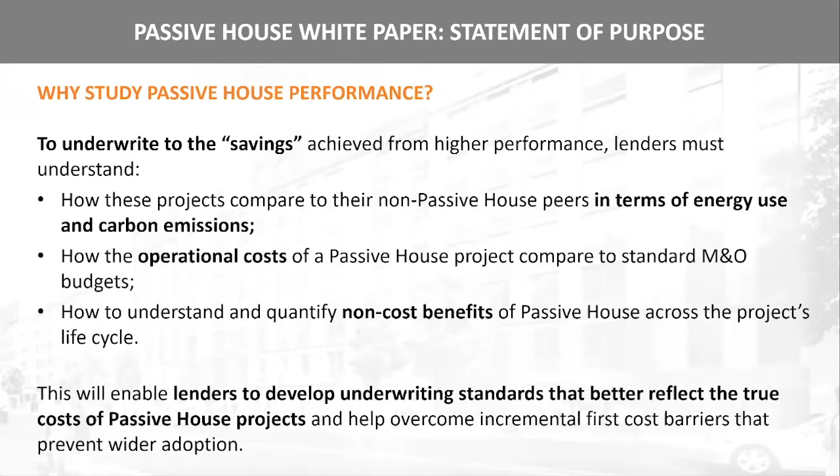In this effort, we focused on understanding the energy performance of these early adopters. We also looked at their carbon emissions and their operational costs in terms of energy. We've begun to look at development costs and non-energy benefits of passive house as well. And our goal in all of this is to really help lenders figure out how to accurately underwrite to these types of projects and help expand their prevalence in the city.

So let's talk about the agenda and go through what we're gonna discuss today. So to start off, we're gonna have some technical background on what passive house is all about. Then we'll move on to looking at the energy consumption of 6 early adopter passive house projects compared to typical multifamily buildings in New York. After energy consumption, we'll do a similar comparison of our early adopters to peers based on greenhouse gas emissions, and look at the impact under Local Law 97.

Then we'll move on to looking at costs and how energy costs at these properties compare to what would be typical budgeted costs in an affordable housing underwriting process in New York City. We'll then lay out a methodology for underwriting to energy savings in these types of projects. And finally, we'll summarize our takeaways and talk about next steps for continuing this research into the future. So let me pass it off to Joanna from Steven Winter Associates to give us the technical background.

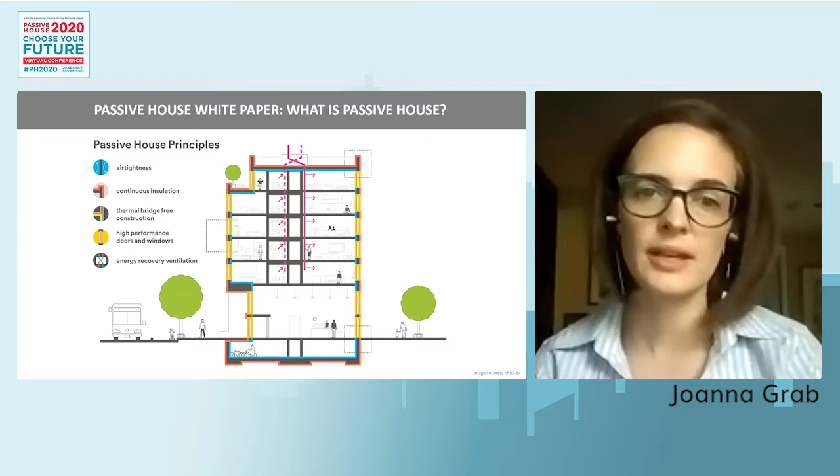All right. So you may already know about passive house, but let's highlight some of the features that make passive house projects different than a typical building. Passive house can be any type of building. It is not exclusive to residential, and the goal is to design and perform very efficiently, and it uses a systems approach. Some of the features, as you can see, are an airtight building with continuous insulation, high performance windows and doors, reduced thermal bridges, and that these buildings require inspections and a team approach during design and construction.

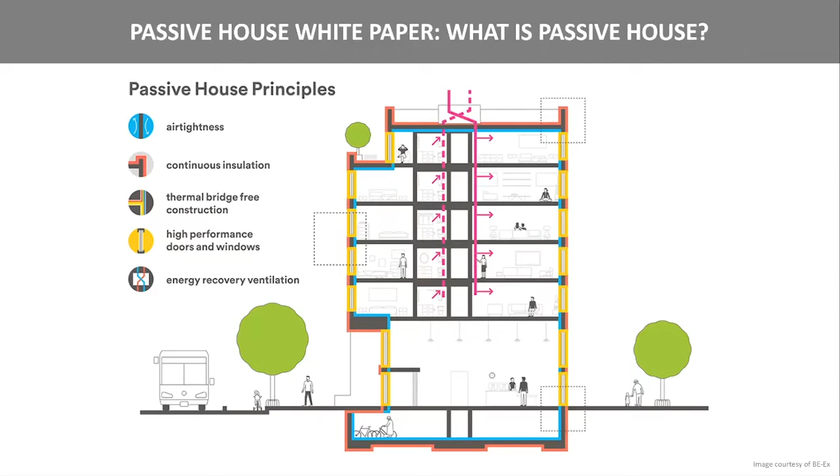Another really important feature is that they have controlled filtered air pathways for fresh air coming into the building and another separate pathway for air exiting the building. So we use something called a heat or an energy recovery ventilator to provide this ventilation. And as a result, these buildings require smaller heating and cooling equipment. So they often use a VRF, which is a variable refrigerant flow. It's a centralized heat pump system that offers heating and cooling, much like a refrigerator that can operate in both directions.

So passive house buildings are really impactful to both residents and the communities that they're in. So they're really efficient. They reduce energy and carbon and align with the international and New York City climate goals.

They have low operating costs. They are resilient, kind of like a thermos, so residents can shelter in place. They're comfortable. Air tightness and an improved envelope means better thermal comfort and quieter spaces for occupants. And they have a big health impact. There are improvements in air quality over a traditional building, and that's a result of providing an exchange of fresh and filtered air and a separate pathway for exhaust air.

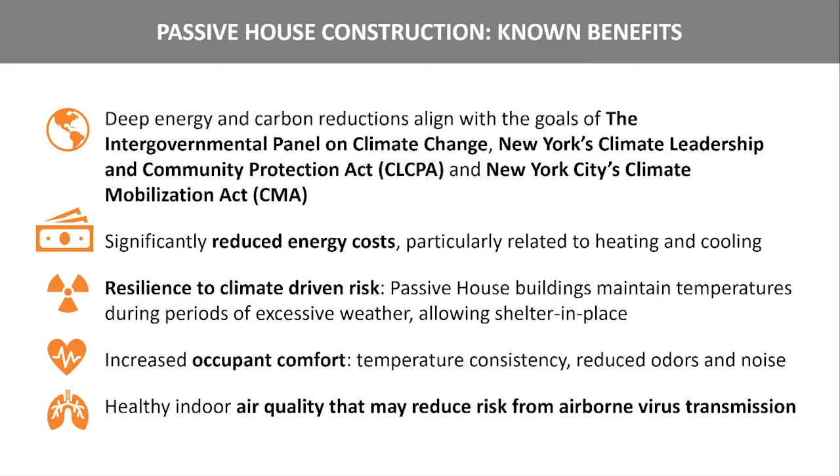All right, so when we're looking at these types of projects, we look at energy models and also reality. So energy models are informed estimates. This is why we want to see how these buildings are truly performing, how the energy model compares to reality. So energy models are useful for evaluating one model against another, but we know reality is different. The goal in a perfect world is to have these aligned.

Specifically, we need to look at how multifamily energy model defaults account for a few different things. So there's a lot of behavioral differences. Americans just have different habits than Europeans who wrote the initial passive house standards. These have evolved, but it's still a good thing to really focus in on. I like to think about just our hygiene habits. Do you turn your shower off while you soap up? I don't think so.

Another aspect is density. So models utilize certain density counts based on square footage or bedroom counts. How does that differ from real life, especially in dense cities? Another aspect is unit size. We New Yorkers, we know about small apartments, especially now. This density is not universal for apartments across the US. This is a unique factor in New York City multifamily projects. And so, a very granular level of data and monitoring will tell us this. So this is a starting point, and we want to investigate dense multifamily buildings and how they operate.

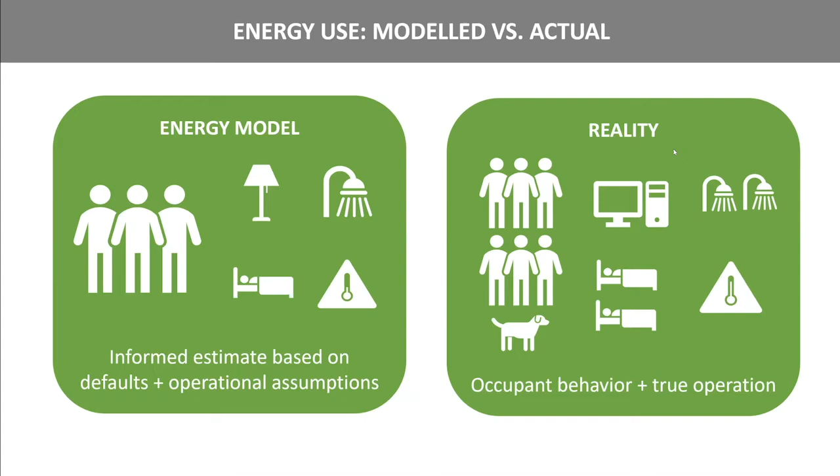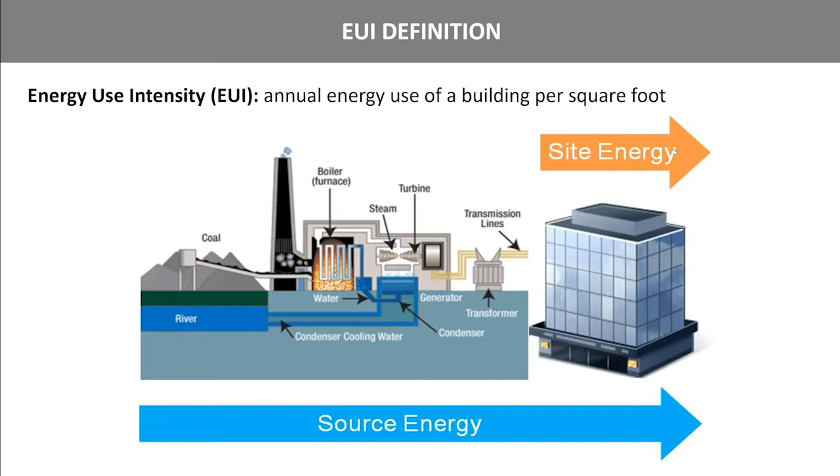Another type is site EUI, and that looks at the amount of energy consumed just on that particular site. And both of these account for different fuel types. So we'll be talking about site EUI when we're analyzing these particular buildings.

Great, thanks for that really helpful background, Joanna. So we're now going to dive into the first piece of results, which is looking at how passive house projects compare to their peers. Quickly to explain kind of our methodology for doing this comparison. The first step was we looked at data that was already available within Bright Power's Energy Scorecards database to identify a set of passive house projects that we already have data on. Now, Bright Power's Energy Scorecards is an online service for tracking energy and water use. So it's important to realize the data that we got wasn't originally captured as part of a study. It was building owners trying to track their performance of their properties.

So we actually had to review this data really carefully, make sure it all met the same consistent criteria. And we whittled it down to a set of 4 New York City multifamily passive house projects in our database that met the criteria. Then folks from Steven Winter Associates contributed data on another 2 passive house projects. So you'll see a set of 6 passive house early adopters that are our kind of key data set for this project. I will say that in our next step, we would really like to expand that data set. We already have about 20 that were tracking in Energy Scorecards, although they didn't all have the same level of data as these that are included in the study now.

Our next step was to create peer groups. And so we also leveraged Bright Power's Energy Scorecards database for this. We looked at 2 peer groups for comparison. The one to pay most attention to are buildings built in 2003 or more recently. Those we think are the right peer set for recently constructed multifamily passive house projects in New York City. And then we have another one for comparison of the older projects that were built before 2003.

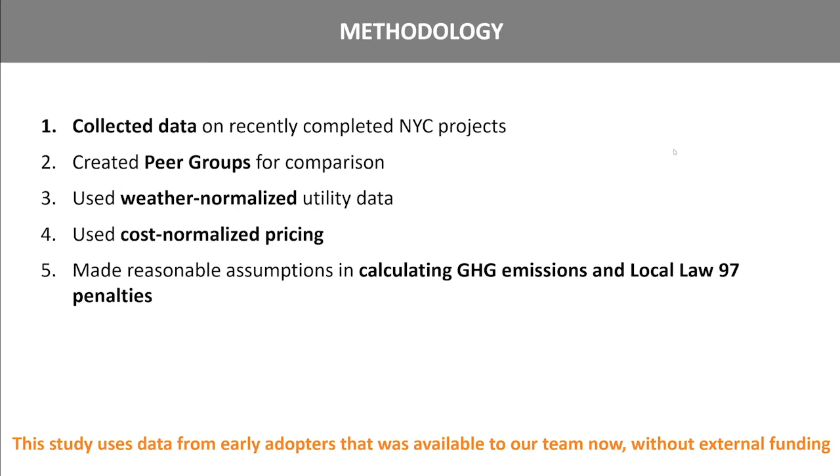We also normalized for weather and for cost when we get to the cost comparison, because we want to make sure that slight differences in the time period that was used aren't screwing up our comparison. Finally, in the greenhouse gas emissions comparison that you'll see, we used actually the same assumptions for emissions factors that are in Local Law 97 in New York for calculating greenhouse gas emissions from our passive house set, so that it's an even comparison to how buildings would be treated under that law.

We're really excited to share these results. I'll pass it to Jamie to tell you a bit more about the data in detail. Great, thanks so much, John.

So one of the first steps in setting up our comparisons was establishing our peer groups of conventional buildings that we were going to use as control groups for this study. So at the top left-hand corner of the slide here, you see our base case building group. And for this group, we decided to use buildings in New York City that were constructed using conventional building methods that were built after 2003.

And our goal with this was to make sure that we're comparing recently constructed passive house buildings to recently constructed conventional buildings. We didn't want age effects to play into the results. We wanted to make sure that the results we're seeing in this study were the result of high performance design techniques and technologies and not a result of age effects.

So in this post-2003 control group, we have 315 buildings from Bright Power's Energy Scorecards database. They all have at least 12 months of operational data. We decided to use a mix of gas and electrically heated buildings because our passive house groups also have a mix of gas and electrically heated buildings. And we have 315 buildings all built after 2003.

Having said that, our team was also really interested to see how our passive house buildings compared to a much broader group of existing buildings. So in the bottom left-hand corner of the slide, you see that we also decided to include a pre-2003 control group of buildings. So this is a much bigger data set. We have 1,633 buildings, again, with 12 months of operational data at a minimum. Again, a mix of gas heat and electric heat.

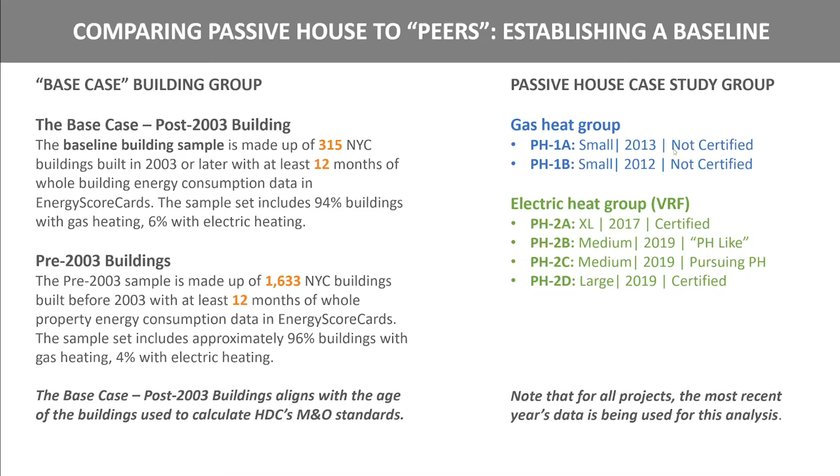There has been an incredible increase in interest and in the number of passive house projects that are in pre-development and currently in construction. But again, we needed 12 months of operational data in order to include them in this study. And so we were fairly limited. And so the buildings that we have here represent the early adopters, and they represent the first available data for multifamily passive house buildings in the city.

So one thing just to note is that we're really excited to see this sample size increase over time, as John mentioned, and look forward to getting more data in the coming months and years as more passive house properties come online. But for now, we've got 6 study buildings and 2 control groups, and you'll start to see our results beginning with energy use intensity on the next slide.

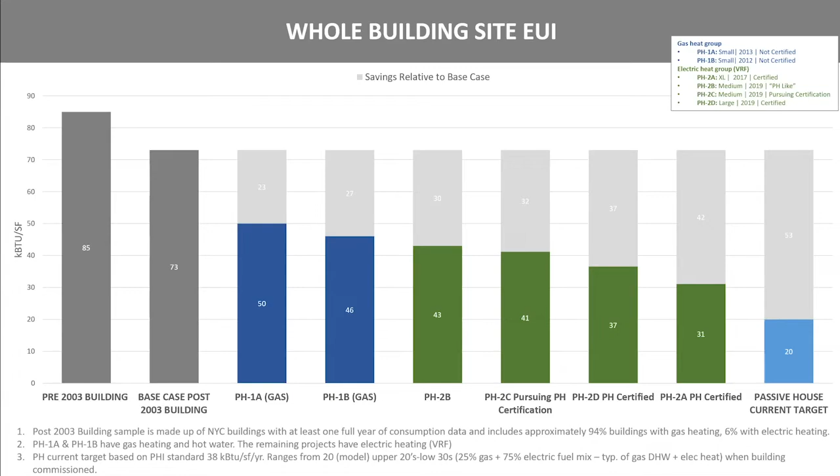So what is this graph telling us now? The performance of these passive house and passive house-like buildings in the blue and green bars are not quite meeting that passive house model target. They're approaching it. So for those of you who've attended this conference for the past several years, we in the passive house community have been anticipating a performance gap, and we need to use actual energy use to identify this gap. So now we have it.

So we'll talk a little bit more about what we can do to follow up on this in the future.

Like John said earlier during our agenda slide, EUI isn't the only way to evaluate these buildings against their peers. We looked at greenhouse gases, which trap heat in the atmosphere, and they include carbon dioxide mostly, methane, other gases, and they're measured in carbon dioxide equivalents. This is really important in New York City because buildings are responsible for 2/3 of all carbon emissions.

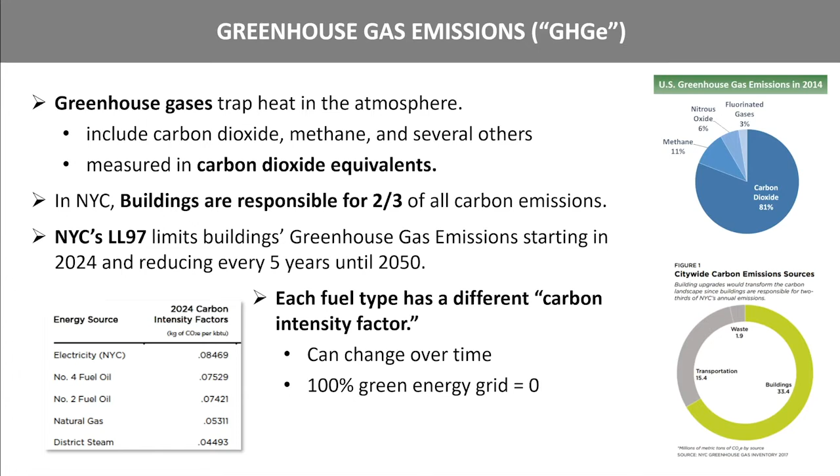And New York City recently enacted Local Law 97 to combat building level greenhouse gas emissions. Each fuel type has a different impact depending on how much emissions it yields. When the energy grid is all green, the carbon intensity factor will be 0. That's the goal. Thank you, Joanna.

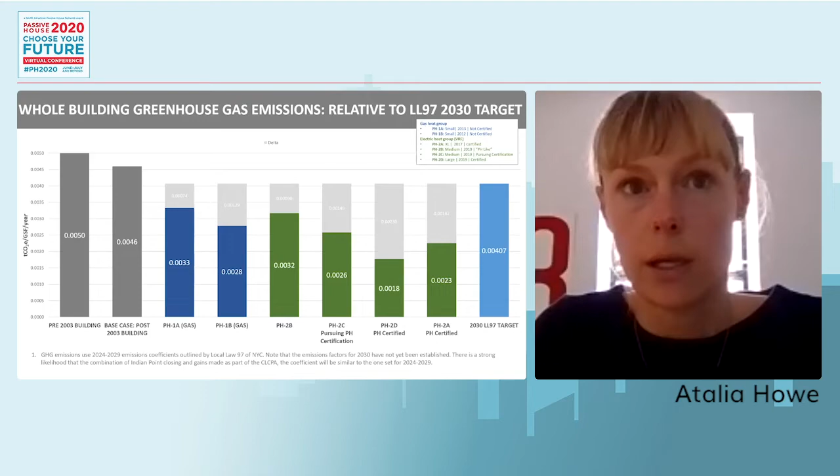So here we show how the Passive House study group and the pre and post 2003 control group perform in terms of operational greenhouse gas emissions per square foot compared to New York City's Local Law 97 2030 emissions cap, which is shown in light blue to the right. So the greenhouse gas emissions were measured using the 2024-2029 emissions coefficients outlined in Local Law 97 for both gas and electricity. And it's important to note that affordable housing is currently exempt from Local Law 97 caps.

However, given the impact that this subset of the building stock has on overall citywide emissions, it's very likely that they will eventually be pulled into the law in some shape or form.

As you can see, all of the passive house projects, even those that use gas for heating and domestic hot water, would easily comply with the 2030 emissions caps and are in fact comfortably below the caps. And what this really sums up is that these buildings will not need to invest in measures to reduce their greenhouse gas emissions in order to comply with Local Law 97. Compliance is really built in based on their energy efficient design.

Local Law 97 stipulates that an owner of a covered building that has exceeded its annual building emissions limit shall be liable for a civil penalty of the difference between the building emissions cap for the year and the reported building emissions, multiplied by $268. In other words, to simplify that, $268 per metric ton of carbon dioxide equivalent over the limit.

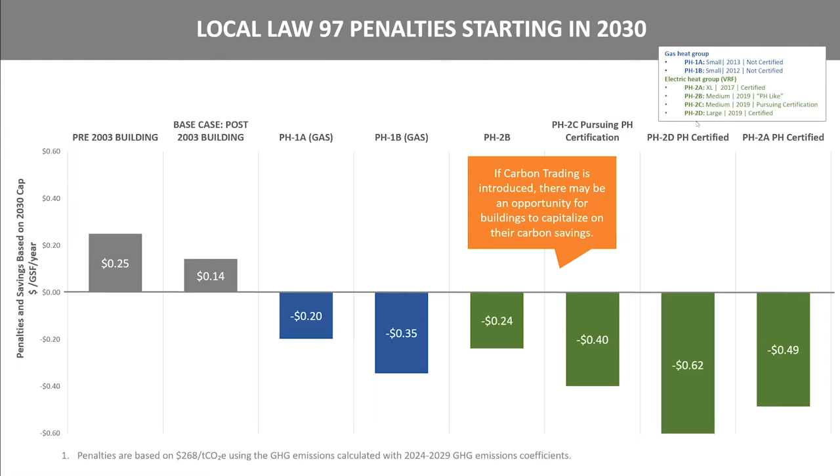Here we show how the Passive House Study Group and the pre and post 2003 buildings in our control group perform in terms of operational greenhouse gas emissions per square foot compared to New York City's Local Law 97 2050 emissions caps, shown in light blue again on the right. Greenhouse gas emissions were measured using the 2024-2029 emissions coefficients for gas, and an emissions factor of 0 was used for electricity. This is predicated on the goals of New York State's Climate Leadership and Community Protection Act, which assert that New York State will have an emissions-free electric grid by 2040.

And as you can see here, even when evaluated against this ambitious target set for 2050, all but one of the Passive House projects comply with the cap, and all of the electric heat group projects in green are equal to or below the cap.

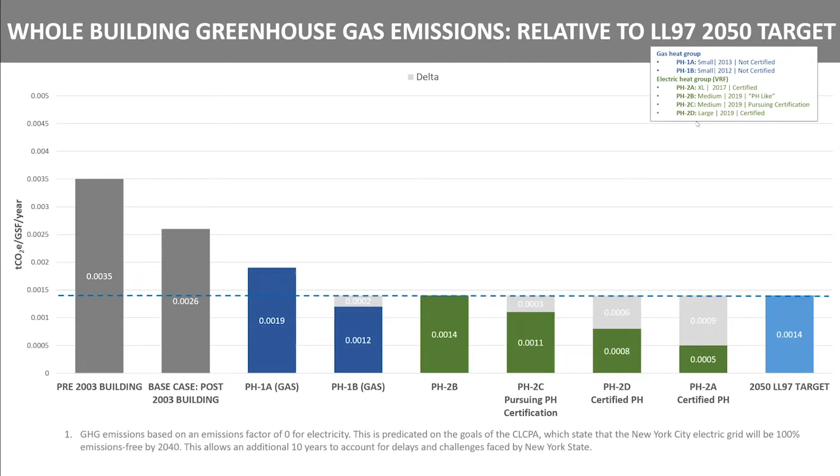Again, this chart shows the greenhouse gas emissions reductions we saw on the last slide translated into avoided penalties or cost savings per square foot, illustrating the reduced financial risk for these buildings as a result of carbon regulation. The base case buildings could face steep fines if no work is done to reduce the building's operational carbon emissions, whereas all but one of the passive house buildings are already in compliance.

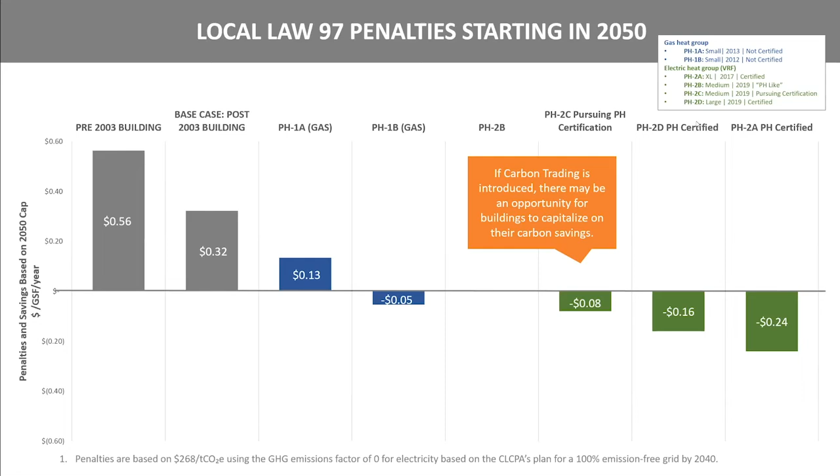This really just highlights how future-proof these buildings are, and the way they're designed allows them to never hit the penalty threshold. Summarizing what we saw on the last slides, here we show the total avoided penalty for each passive house building and the base case control group, based on the building's total gross square footage and the Local Law 97 penalty of $268 per metric ton of carbon dioxide equivalent.

If a carbon trading scheme were introduced in New York City, this would allow building owners to capitalize on their carbon savings, selling those savings to building owners whose carbon emissions are above the limit. As the table shows, these potential revenues could be quite significant for building owners, ranging from nearly $5,000 to $132,000 per year in 2030.

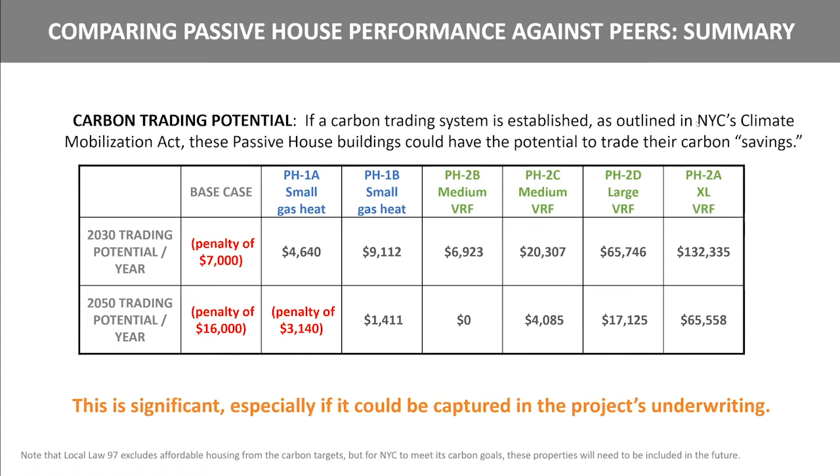Given the more stringent caps in 2050, these amounts are slightly lower. However, all but one of the passive house projects avoid paying any penalties at all. On the flip side, the base case buildings could face penalties for being over the cap if they do not pursue low carbon retrofits between now and 2030. This really highlights the importance of taking a long-term approach when evaluating the full costs and savings of high performance.

Thanks so much, Atalia. Really compelling. I want to quickly recap what we've learned so far from this comparison of our early adopter passive house to peer multifamily buildings.

Even with this small data set, it's really clear that the passive house projects are performing substantially better than other recently built New York City buildings. On the energy side, we saw EUI energy use reductions ranging from 32% up to 58%, and on greenhouse gas emissions from 28% up to 62% reductions.

Some observations we want to dig into further in future study: on the energy side, the passive house certified projects do seem to perform better than non-certified properties that were just designed to passive house standards. Also, the electrically heated properties perform much better than the gas heated properties. So insights there that we can keep exploring.

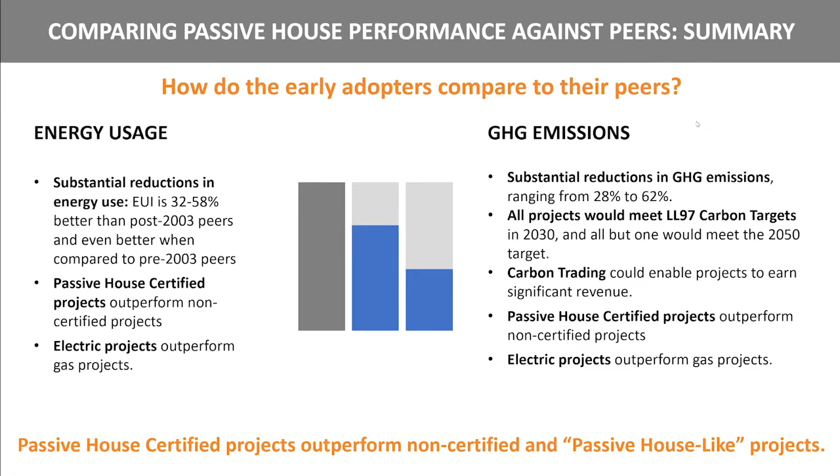In terms of Local Law 97, the passive house projects not only meet the targets, but if carbon trading is rolled out, which as Atalia mentioned is being actively discussed, they would not only avoid fines but could represent a significant revenue opportunity, which I think is particularly compelling for affordable housing that could pursue passive house and get a new revenue stream for that property.

Great, thank you, John. So next we're going to take a deep dive into each of the passive house buildings that we studied in this project. In this next section, we're going to set aside the control groups we talked about previously.

Instead we're going to compare the actual performance of each of the 6 passive house study group properties to their expected performance. From there, we're going to start to understand actual performance versus expected performance, instead of, as earlier, actual performance versus conventional building actual performance. I'll explain next how we're going to do that.

What you're seeing here on this slide, on the right-hand side, is the case study building. This is a cost and weather normalized chart of the actual utility expenses using data from the most recent year. Gas is shown in orange, electric is in blue, and the savings are shown in a light gray bar. On the left-hand side, you see the expected performance.

For this chart, we're using the standard underwriting assumptions provided by HDC and NYCHA. In order to get the building owner costs, we use the standard HDC underwriting allowances in the M&O standards, and for tenant electric we used NYCHA standard assumptions.

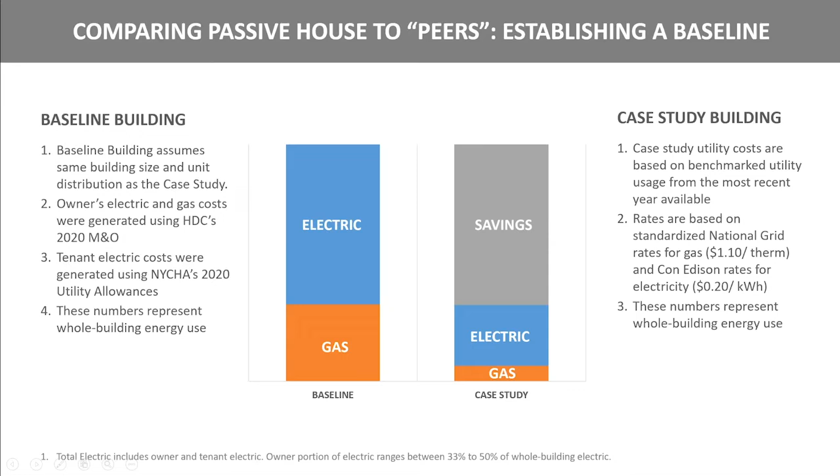In the next slides we're going to talk about how each of these case study projects compared to what their performance would have been if they were designed and built using conventional methods. Our goal with this study and analysis is to understand the cost savings and then strike up a conversation about if and how we can capture some of those savings in underwriting. So I'm going to turn it over to Jen, and she'll talk us through each of these case studies.

I'm going to walk you through the 6 case studies, the 2 gas heated projects and the 4 electric heated projects. I'll spend a little more time on this first one so everyone's familiar with how to read these case studies. I think that'll make it easier as we go through all of them.

The first project is a small building completed in 2013 with gas heating. It was not certified as a passive house project, but it was done by a committed team of early adopters who were way ahead of the curve for multifamily passive house in New York City. Even though it's not certified, the overall energy savings are really compelling compared to the baseline. We're seeing savings equating to over $40,000 per year. That's pretty significant for a small building. It also means the building is using less than half of its budgeted energy costs.

If even 50% of these savings were underwritten, the project could leverage from $200,000 to $300,000 of additional debt and reduce the subsidy required to build this. We're using rough calculations to illustrate this, but it's useful to contextualize the idea of underwriting to savings. Before I move on, remember these case studies are abstracted using normalized costs, so they won't match utility bills exactly. Also remember they show whole building energy use, which includes tenant electric as well as owner.

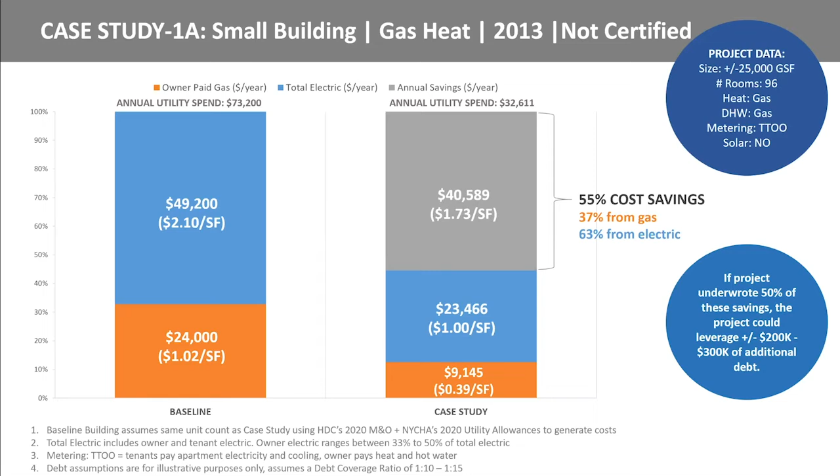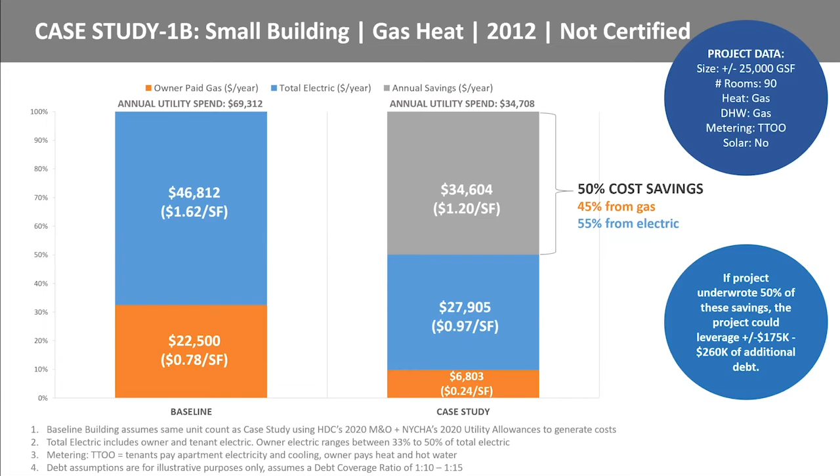The next case study is really similar to the previous project, although it was completed one year before. The savings and energy profile are very similar, and again it's clear there's a lot of additional debt that can be leveraged.

Now we're going to talk about 4 projects with electric heating, VRF systems, just to be clear. This project is a very large and very tall building, also noteworthy in New York City. While this project is not specifically an affordable housing project, we modeled it that way so we could compare it to the other case study projects. You can see that the energy costs are reduced by nearly half, which is more than $300,000 per year in utility savings. Pretty substantial.

This project also has a lot of studio apartments in it, and they tend to have higher energy use intensities than larger apartments, which makes this even more compelling. A really large project like this could potentially unlock more than $2 million in additional debt, also significant.

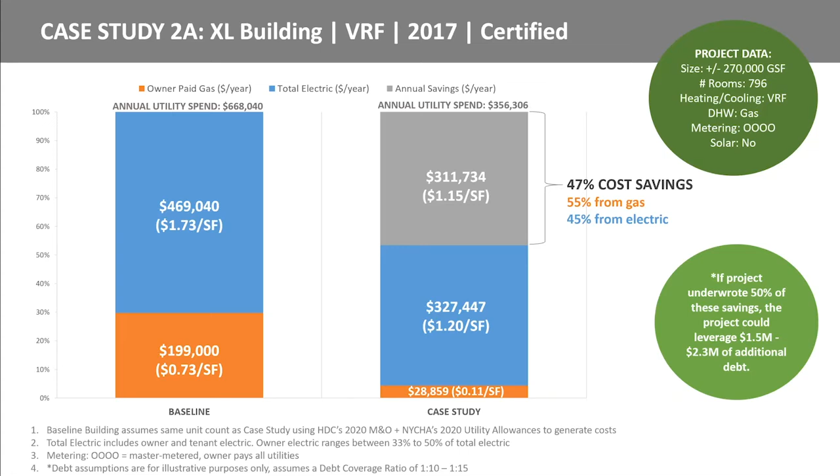A couple things to note for the electric projects. Electric heat is considerably more efficient than gas, but it does have a higher unit cost—electricity costs more than gas on a per unit basis. So while there are significant energy use and carbon emissions benefits, the costs don't quite keep up with that. Keep that in mind. Also, gas has not been completely eliminated on these projects; it's still used primarily for hot water heating. And another thing to note is all of these projects have heat paid by the building owner, which is relevant to some of you, probably more than others.

This next case study is a bit of an outlier. It's our only passive house-like project. Not only was this not certified, it was never intended to be certified, but it was built to passive house standards. We included it because, first of all, we have a limited data set, but also it achieved really significant savings, and it was a useful comparison for the other projects. You can see it reduced its utility cost by almost 50%.

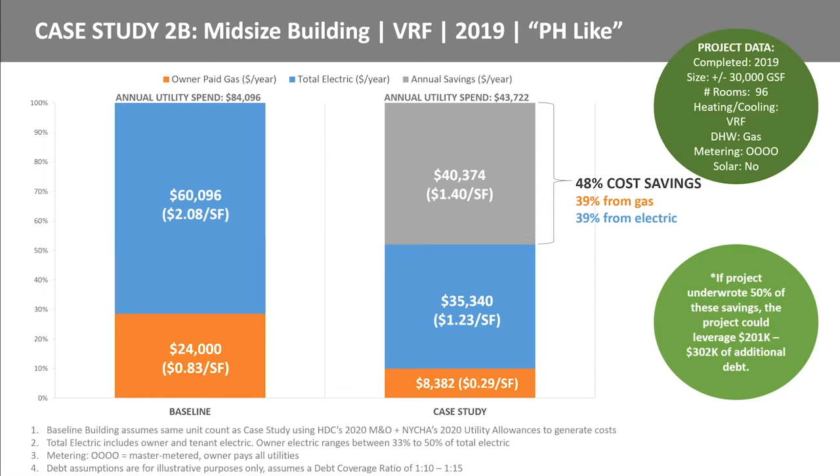This next project is another mid-sized project, and it was the first passive house project for the developer, although not the entire passive house team. It has a solar array to help offset the electrical cost, which is key for some of these projects with electric heating. One thing I'll say is it did not complete until late 2019, and we only have first-year data on this project. That can sometimes be overly high as building owners learn to manage and commission the systems, and as tenants get used to using electric heating and controlling their own systems, which is new for a lot of people in New York City.

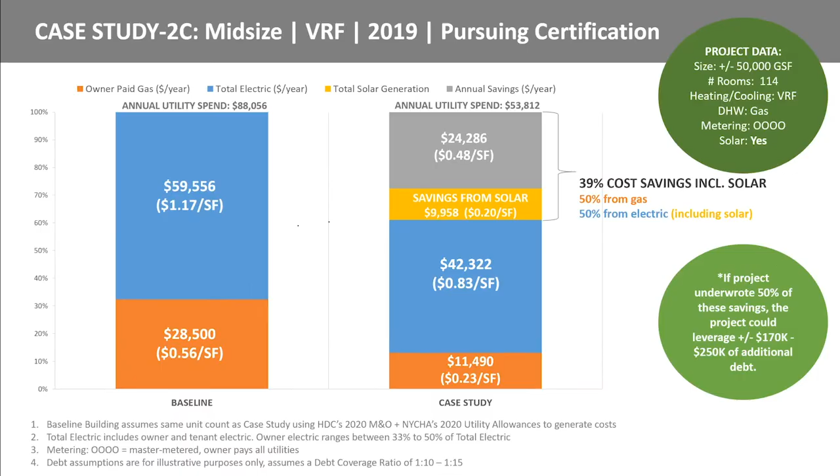Finally, our last case study, and this one is certainly the most compelling in terms of cost savings. This project really pushed the envelope—that's kind of a bad pun—but it included cogen to supply most of its hot water heating and an extensive solar array across a huge percentage of the roof.

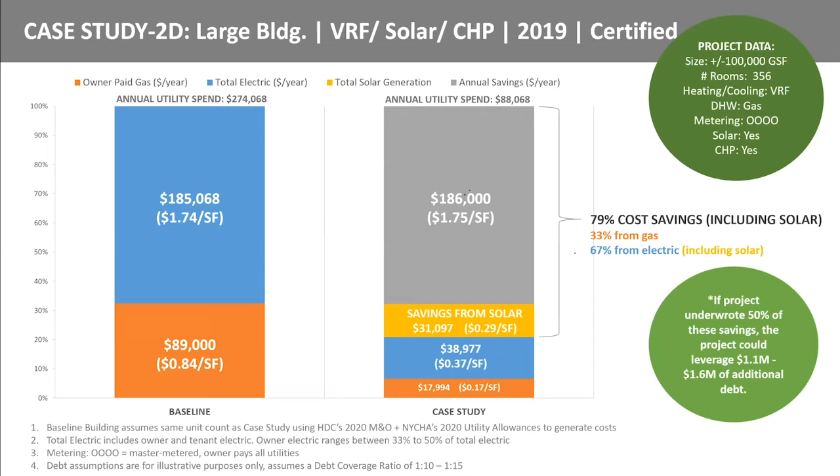The combined annual savings of this project, when you take solar into account, are well over $200,000 a year, which is really great. And in this case, if the project underwrote 50% of these savings, an additional more than $1 million could have been leveraged to support the higher incremental cost. It's really challenging to draw conclusions from only 6 projects, but you can see that overall the case study projects are performing extremely well, especially given that these are the earliest adopters, the pioneers. The cost savings are really significant, and we've seen that that can unlock additional debt to support the project costs.

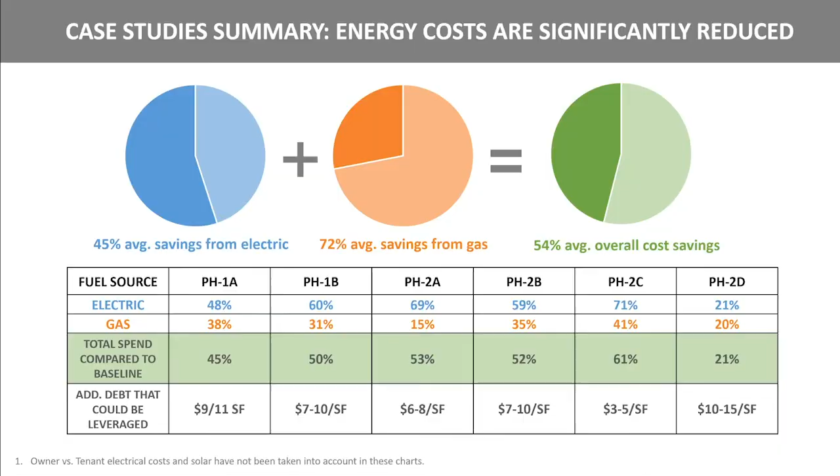Now that we know how well these projects are performing, though, what do they cost? And do the cost savings support the additional cost? Let's talk about that a little bit.

I'd love to be able to say, and I'm sure you'd love to hear it, that we have accurately determined the incremental cost of Passive House in this study, but I can't. I'm not going to do that. We do think that the 3 to 8% range that New York City experts suggest is really accurate. We've seen that to be true, as well as we could understand that by doing this study. And definitely the experienced teams can produce these projects at the lower end of that range.

We also learned a few other things. One, it's extremely difficult to isolate the costs since nobody ever builds the non-passive version of their project. The costs kind of get lost in the noise, and that's because projects in New York City tend to have high costs for a number of factors.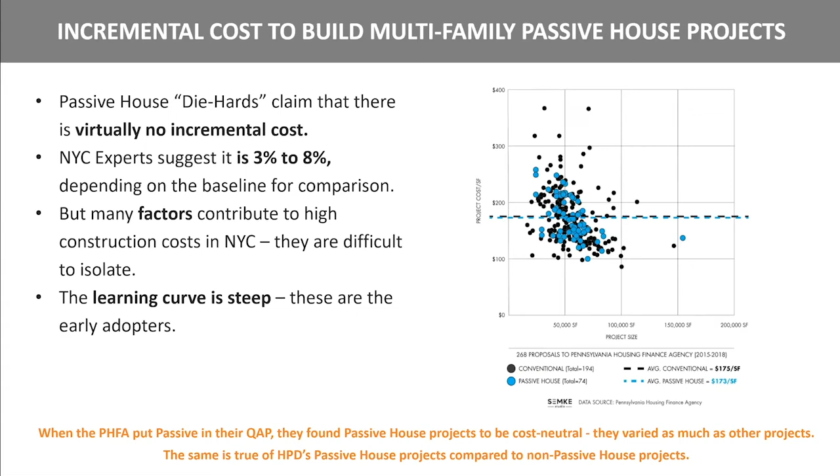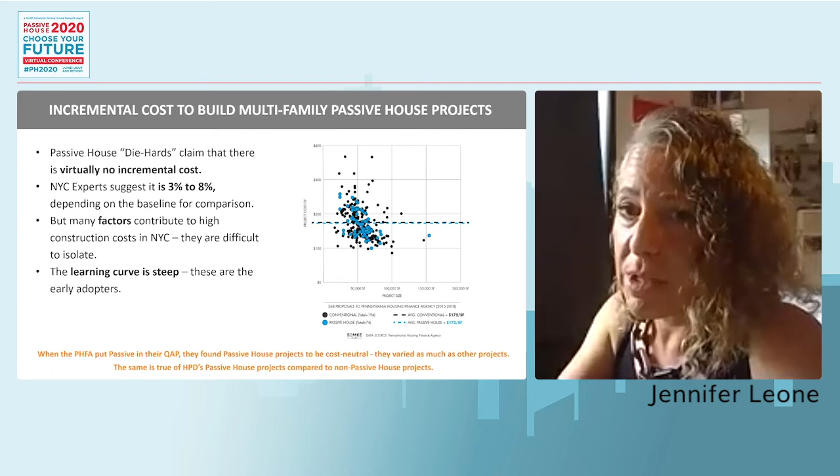This is exactly what the Pennsylvania Housing Finance Agency discovered when they put Passive House in their QAP in 2017. They saw that of all of the significant number of Passive House projects that were built, some cost more than average and some cost less, just like their pool of conventional buildings. We found the same to be true for HPD's projects. Projects can be higher, projects can be lower, and that's true of everything. Certainly, as they say, every project is a snowflake.

So what does drive the cost? The biggest hard cost drivers are related to the HVAC systems and high performance windows, and maybe a little bit of padding to account for the unknowns. Design and Passive House certification can also add to the project's soft cost, although less significantly. And there's some evidence that there is additional maintenance costs for the HVAC systems, particularly ventilation and VRF. That might impact the bottom line a little bit when underwriting Passive House projects.

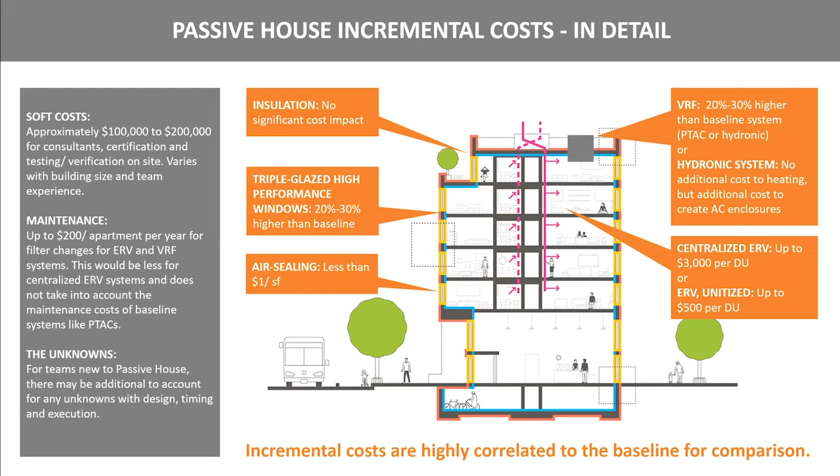But a few key things to note: the costs are coming down as the learning curve flattens, and also more products become available at lower cost. And finally, incremental costs are highly correlated to the baseline being used for comparison. This too will change as codes evolve and more people become familiar with Passive House.

So one way we look to cover the incremental cost associated with Passive House construction is to incorporate the utility savings from improved energy performance into the first mortgage. We do that by increasing net operating income. Net operating income is calculated based on the difference between effective gross income, which takes into account risk factors like vacancy rates, and typical operating expenses represented by the maintenance and operation standards.

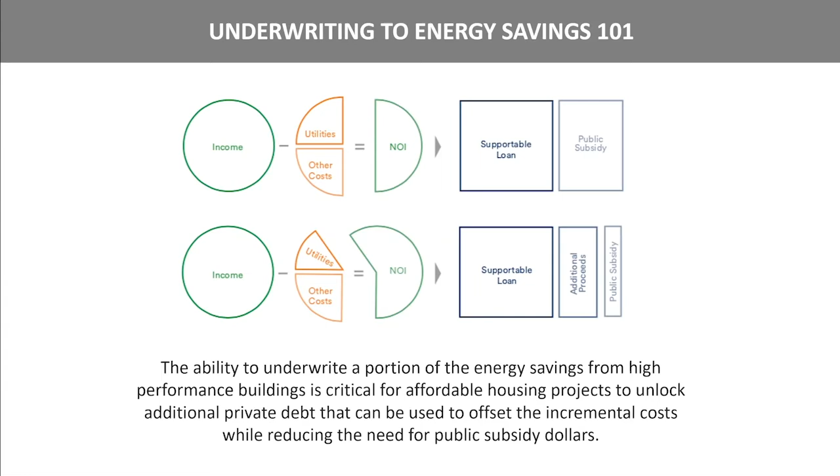To increase NOI, you either need to increase gross income by raising rents, or you need to decrease expenses, which are mostly fixed. If we can prove out some measure of cost reduction for certified Passive House and Passive House-like buildings, that gives us a lot of opportunity to not only increase the supportable loan by reducing expenses and increasing NOI, but to potentially decrease the amount of subsidy required from city and state agencies that are committed to investing in comfortable, efficient design for affordable housing.

So here we've used the actual annual utility cost from one of the gas-fired Passive House-like buildings to demonstrate the savings potential when compared with the M&O standard and how it affects private debt and subsidy. If we zoom in to just focus on the utilities, we see that the actual annual utility costs from the Passive House 1A building come out to less than half of the cost projected by the New York City Housing Development Corporation's M&O standard expenses.

That means that we have the potential to capture some of that portion of the 56% savings, to leverage additional private debt. These savings provide us the financial leeway to preserve our valuable city and state affordable housing resources by reducing the amount of subsidy needed to finance these projects.

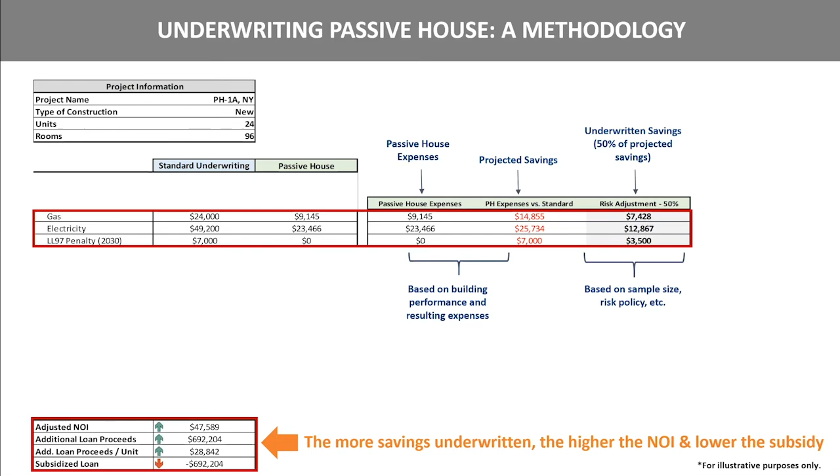And then the last thing to note is that we've incorporated the Local Law 97 trading potential that we explored earlier in the slides as an additional source of income in these buildings. That's the $7,000 that you see on that line.

The issue that some lenders face now in underwriting passive house performance is a lack of available and reliable cost data for use as comps. M&O standards are created using income and expense data from hundreds of existing buildings, and we just don't have data from enough passive house certified and passive house-like buildings to give us the full picture of financial performance.

While we continue to study existing stabilized passive house buildings, there are a few ways we can accommodate the risks of more aggressive underwriting and encourage further adoption of these design principles. One is to understand the project elements and the team's experience and how those factors affect project outcomes. More experienced teams mean stronger timelines, more reliable results, and ultimately less risk for the project.

Once you've assessed the team and design elements, that helps the lender estimate how much of the savings they're willing to incorporate. From there, lenders can calculate NOI using adjusted expenses that come closer to actual passive house performance, and then determine the additional leverage and new supportable loan amount.

Underwriting passive house performance and cost reduction into the first mortgage takes into account the financial stability of the project, but we're not able to fully capture improved property condition, tenant satisfaction, and reduced operational carbon emissions associated with these design principles. These factors, while not directly calculated in the first mortgage, contribute to overall asset health and the value added by building to passive house standard or incorporating passive house design principles.

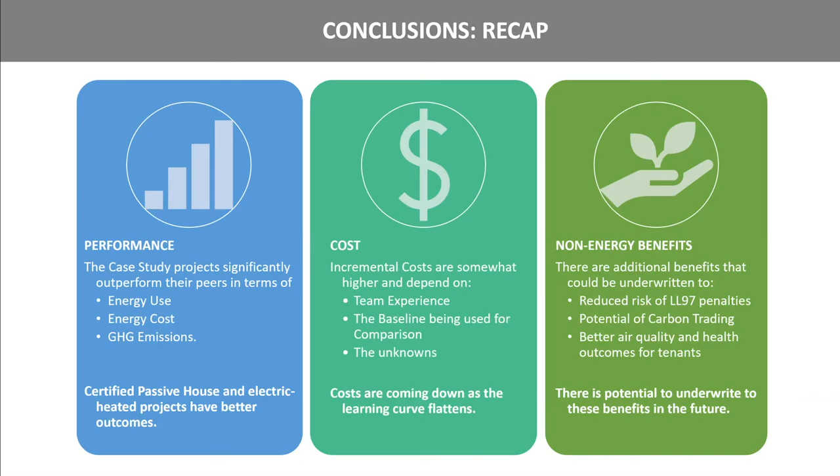All right, so lessons learned. We said we'd revisit this. These early adopters, these passive house multifamily pioneers, are not at the modeled passive house target, but we're getting there. This is a starting point, and it's really important for the industry.

We have some performance data, but we need more information. So what do we need? We need a better understanding of the reality. We need additional monitoring on a more granular level.

So we want to know a little bit more about tenant behavior and different types of schedules, what's actually going on in these buildings. Once we have that understanding, it will help the industry identify what end uses can be tweaked to reduce the gap between actual and modeled performance. We know this is really challenging, and it's just challenging to even get utility data to obtain and analyze. So we'll talk a little bit more about that in a moment.

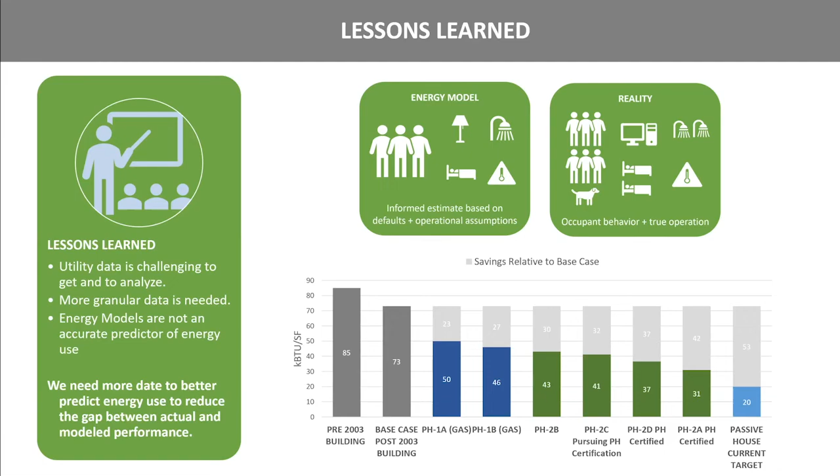And you can see, like Jen said, the Passive House certified and electric buildings are performing better. That's pretty important because it's the level of quality assurance and something that projects can aspire to. So the bottom line is we need more data.

As everybody has noted, this is only the beginning of the story, and there's a lot more to be done. One of the most exciting things is that a capstone team from City College's sustainability program is working with us on a passive house database for multifamily projects. It's based on the research we've done so far.

It collects all the key data points that we need to expand the research in terms of energy use, cost, and a number of other data points, and asks projects to share performance via the EPA's Portfolio Manager tool, which is free.

We do invite all conference participants to add data using the link. It's on the screen, but it's also being broadcast during the presentation. And we think this will be a tremendous resource to the entire Passive House community. And do note that we allow data to be shared privately, so no worries on that end.

I'm going to turn this over to John to talk a bit more about a few other vectors of study that we hope to engage in. Great, thanks so much, Jen.

And so, yeah, as you can see, we're really excited about the results that we've shared today. Even though it's a small data set, the improved performance of the Passive House early adopters is really clear. But we also think it's the tip of the iceberg, and we're really excited to expand and deepen this research in a couple areas that you can see on the screen.

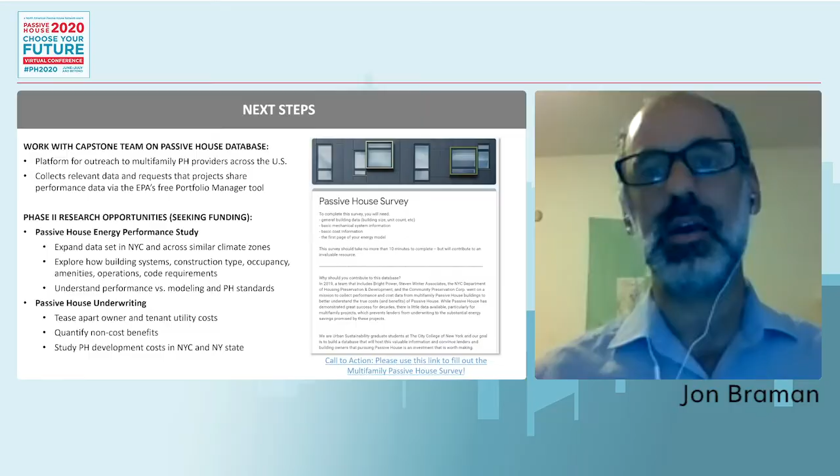First, we want to do a deeper dive on energy performance. We want to expand the data set. We want to dig in on what's behind these performance improvements that we're seeing, do more targeted comparisons based on properties with similar heating and cooling systems, building envelope design, similar operations. We want to dig in on those questions Joanna raised about modeling and why do the Passive House properties perform differently than their models.

There's a lot of exciting stuff to dig into technically, but the second area is to continue to provide research and tools that support lenders on the underwriting side. And that involves looking more closely at the development costs, right? We really want to get a better handle on how New York City development costs with Passive House are changing. We want to tease apart the owner and the tenant parts of the utility cost. Today we presented whole building, we can break those apart.

And we're also excited to create this database. You can think of it as a comps database of Passive House properties and how they perform, to put that information at the fingertips of housing agencies and lenders. So again, we think there's a lot of potential, really excited to continue on this research.

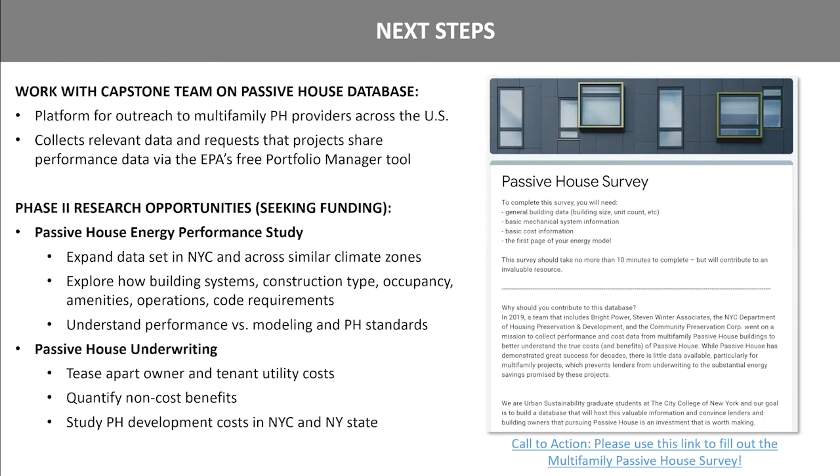Well, it seems like we have a few extra minutes, so we thought it'd be interesting to show you guys a little bit more about the Passive House survey that our capstone team is working on. We really hope that people will be interested in participating. This will, as we said, really advance the cause. It'll expand our database and provide us with all of the kind of information we need to continue to assess multifamily Passive House projects. So a few things about it, and if it's okay, we'll walk through it a little bit just so you can see how easy it is to contribute.

So first of all, it's designed to take no more than 10 minutes to complete. We think that's actually accurate. And this comes out of all of the work we've done during the past, it's now nearly a year, of interviewing building owners and talking to the management personnel and so on about their experience in building Passive House, their understanding of the costs as they saw them while they were building the projects, and a lot of other pieces of information that we think are needed to be able to assess the energy data that's in Portfolio Manager.

You can't really evaluate that data without understanding the underlying systems, the metering configuration, and it's also good to have context of building size and so on. And feel free, team, to jump in if I'm missing anything. But I'll just walk through the survey fields, and I filled them in with really dumb answers. General information, the survey will be geocoded, which will help us assess projects in various climate zones.